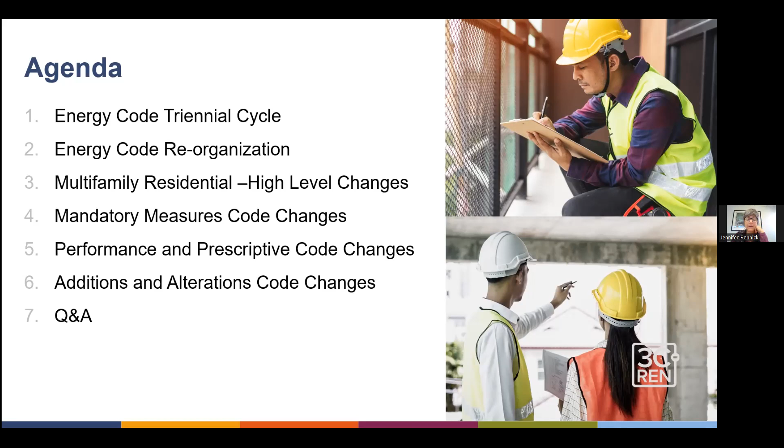Today, we're going to review real quick the Energy Code triennial cycle and just highlight a few of the Energy Code reorganizations. Then we're going to go into multifamily residential, kind of the high level changes, some mandatory measures that have been updated, performance prescriptive method changes, and hit on a little bit of additions and alterations. We'll hopefully have a little time for questions and answers to get to all questions, but like Grant mentioned, if you put them in the chat, we'll be able to take them as they come if it's applicable to the slides.

One of the key things with the California Energy Commission and Title 24, and depending on how long you've been in this line of work, you may or may not know that the California Building Energy Efficiency Standards and all of Title 24, which includes our building codes, they're updated every 3 years. It's a process that includes industry stakeholders, in-house expertise, and the general public. All the decisions that go into the energy code have to be proven that they are cost effective.

Some of the big picture goals for this code cycle for 2022 update is to encourage heat pump technology for space and water heating, and to establish electric ready requirements for single family and multifamily projects. That includes expanded PV systems, photovoltaic solar systems, and battery storage standards that are now applicable to multifamily, both low rise and high rise.

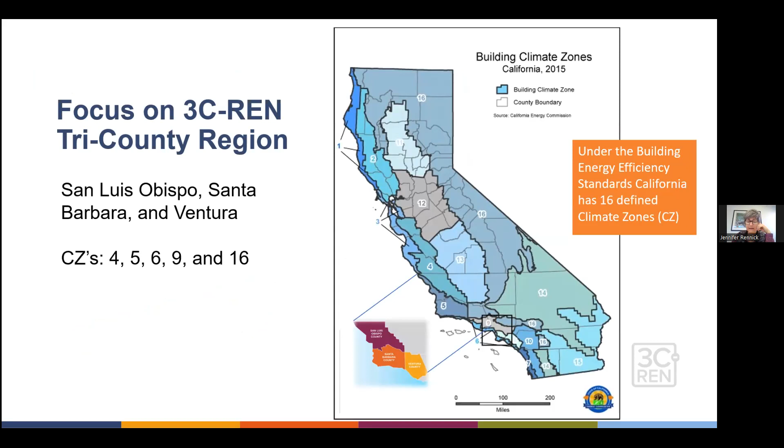So the newest 2022 building code went into effect January 1st of this year, 2023. If you would like more information on the specific code language itself, that's available at the energy.ca.gov website, or you can just Google California Energy Code Standards and it'll take you there.

Also on 3C REN's website, we have a resource library through the Energy Code Connect, and we have links directly to the most recent codes, which I find this link—whoever put this together, Sarah did—made it simple. So it's nice to have it there.

The energy code for multifamily has essentially been reorganized to accommodate the multifamily standards. What I mean by that is the multifamily occupancy type was pulled from what was called the residential standards and from the non-residential standards and combined into its own multifamily standards section of the code.

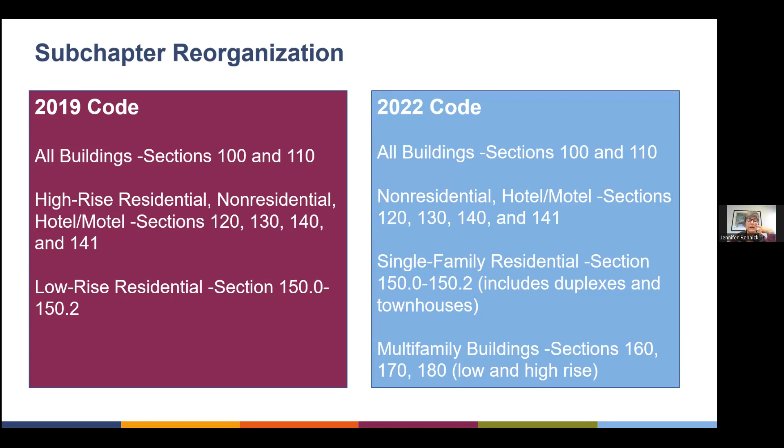Now under the 2022 code, we still have our all building sections, our non-residential hotel motel sections, our single family residences—that includes duplexes and townhouses—but now we've got this whole new section for multifamily buildings, including both high and low-rise residential.

For those of you who are visually oriented—oh, and by the way, you will be getting a copy of the slides, so you will have these as reference—but for those of you who are more visually oriented, I put a building tree out there.

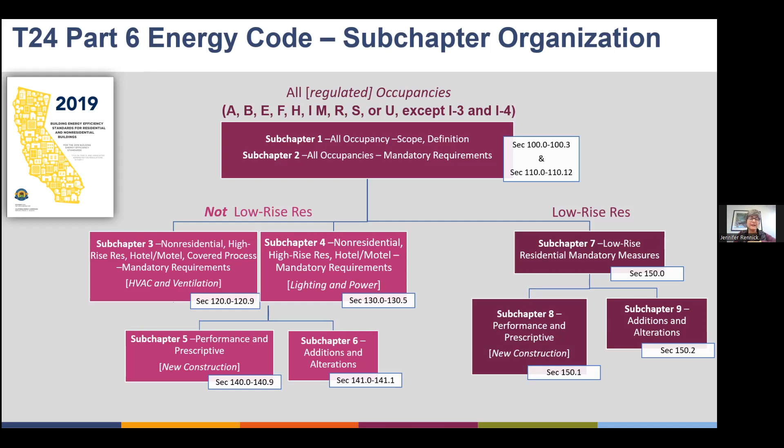So you've got your big categories for everything that is all your mandatory measures for something that hits all occupancy types. Then we had subchapter 7, 8, and 9 that was specific to low-rise residential, and basically everything else that wasn't low-rise residential. Now we've got our non-residential sections, our single family, and our multi-family, and it has its own 3 chapters that mirror the organizational structure that the single family residences followed.

So if you're used to looking those things up in the energy code for single family, the multifamily follows that same kind of hierarchical organizational structure.

And the one key difference now under the multifamily residential portion is it's trying to address within the code common areas that typically are not in the dwelling units, which you would have found in the non-residential section as a separate part from the high rise, even if you're in a low rise occupancy. Now they've combined it so you can go straight to this section to also find out about the corridors, lobbies, staff rooms, lounges, community spaces, and other shared spaces.

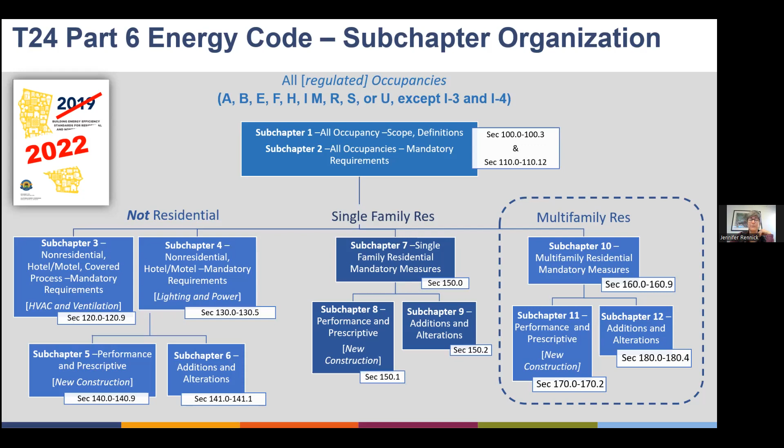The multifamily residences have a few high-level changes applicable to all of the sections, which is that there's been updates on the dwelling unit ventilation, domestic hot water requirements, some space conditioning requirement updates, a few lighting changes—not many actually. There's something called electric ready that you may have heard about for low-rise residential, which is applicable to the dwelling units of the multifamily.

And then there are photovoltaic and battery requirements. PVs were required for single family residences under the past code, but now under the new code, photovoltaics are required for multifamily high rise, including non-res occupancy types, and there's also a battery component with that.

Each code cycle, this is kind of typical, a number of the changes that were part of energy efficiency under the old code cycle get moved to mandatory requirements, and then new requirements prescriptively and optional performance method requirements come into play.

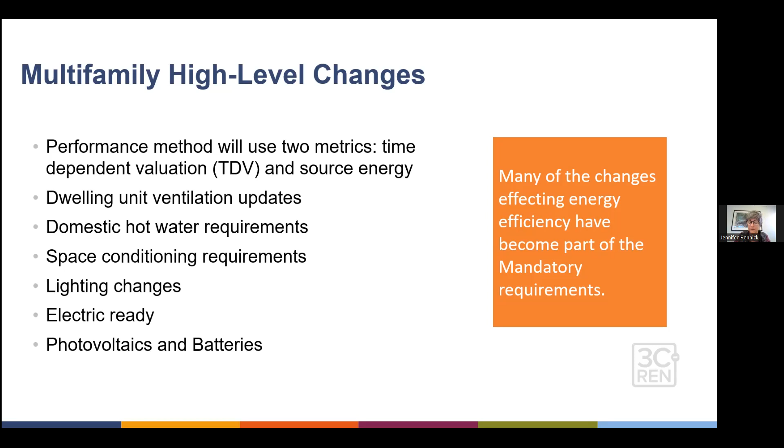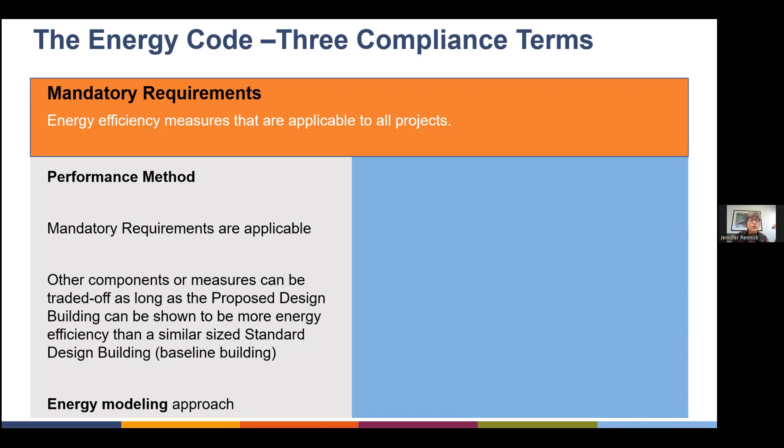There's a little vocabulary review I want to give you. You're going to hear me talk about mandatory requirements, and that's a reminder it's applicable to all the projects regarding energy efficiency. In this case, we're going to talk about a couple that are all occupancy, but mostly multifamily. And then there's the performance method, which means your energy modeling approach, so you can do trade-offs amongst requirements under that approach, but all the mandatory requirements are still applicable.

And there's also the prescriptive component package, or essentially we call it like a checklist approach, sort of following a recipe card. It's this checklist under the prescriptive component package that becomes the baseline for your performance method that you're going to compare to.

So as we go through the prescriptive component package, if you choose to do everything under the prescriptive method, you follow all the parts of the checklist. But a lot of our clients will learn what the prescriptive requirements are, and then when it comes to their actual design, we'll run a performance computer method so they can more or less try to pick and choose and optimize which of those prescriptive component packages are most appropriate for their project.

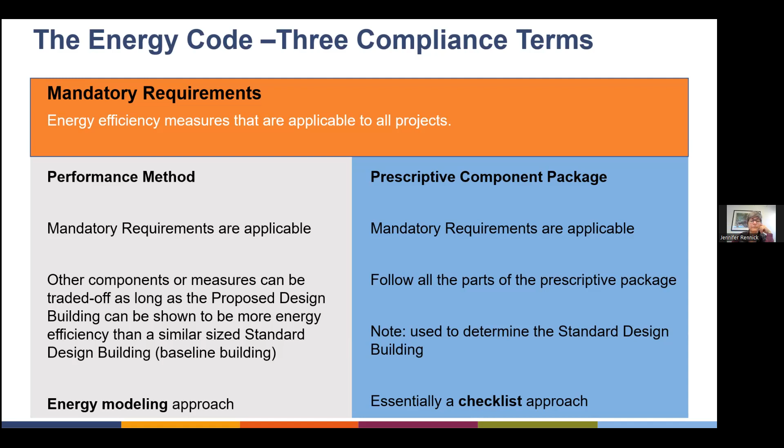There's a new metric when you do the performance method or computer modeling, called source energy budget. This source energy budget is basically being used as a proxy for carbon emissions or carbon footprint. So it's a little different than our old metric, which is TDV, time dependent valuation.

And that is still part of what you have to do to show compliance. But the source energy now adds on another layer that's specifically associated with the pollution, the carbon emissions and other related pollution emissions associated with the distribution and creation of the energy.

Here's a graphic to give you an idea of that. Source energy includes the building, that includes the wind power, solar power, the gas peaker plants, includes all of it, but now it's being used as a proxy for carbon in new construction. And then TDV continues to be the metric for both what's called an efficiency score and a total TDV score.

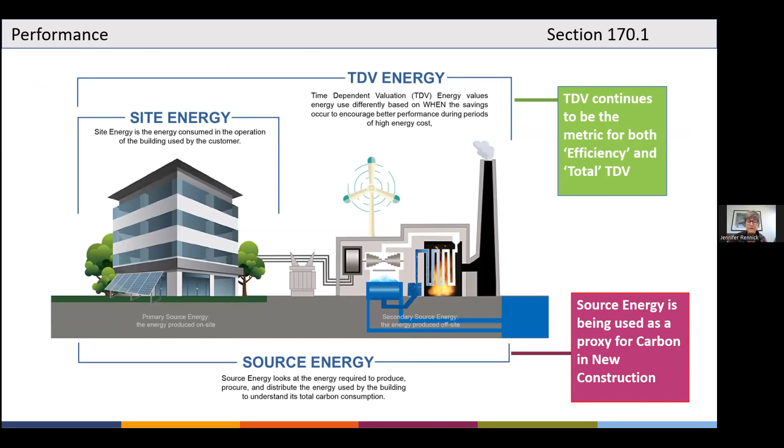So what that looks like now in the compliance form is an excerpt from that: your building complies if it shows pass under the time-dependent TDV valuation, both in terms of efficiency measures and total, which includes your PV battery, and then your source energy total as a proxy.

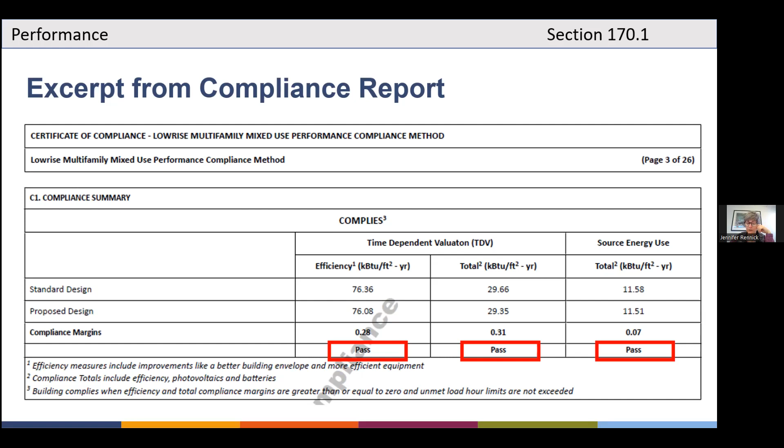I've played around with this a little bit on a couple of projects, and I've had my projects pass under the TDV, no problem. And then I'll have a source energy score where it doesn't quite pass or it's barely passing. If you look at this example, this one's just barely passing at 0.07, which is good enough to get your building permit.

But that carbon, that'll be an interesting thing to play with. I don't know, Grant, if you've had much time to play around with that carbon proxy and see where it lands. But what I found is that I could add more PVs or swap out some gas water heaters to heat pump water heaters, and that took care of that carbon proxy.

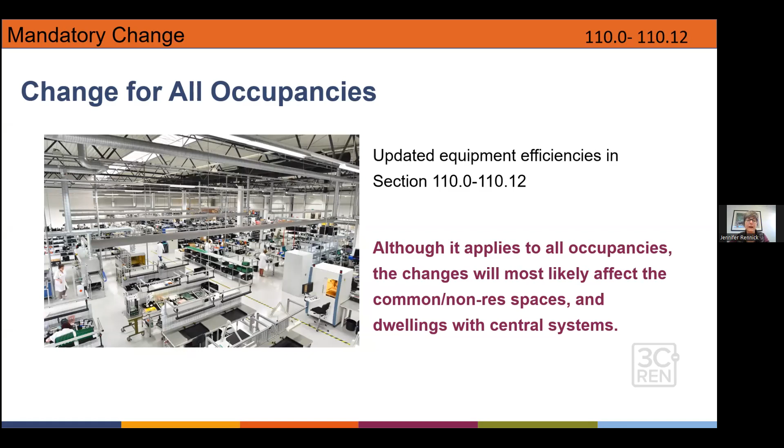For all of the changes for all of the occupancies, sections 110 through 110.12, it's mostly going to affect the non-residential spaces, but because multifamily buildings include some common non-residential spaces, some of these mandatory measures are going to come into play. It mostly has to do with the equipment efficiencies of the heating and cooling equipment, is what I've noticed. Otherwise, a lot of those overall mandatory measures haven't changed that much from the 2019 to the 2022 code.

Now, there is a section under these mandatory measures that I think is worth reviewing, specifically addressing mixed occupancies, which you have with many multifamily buildings. In other words, you may have a large portion of that multifamily building being actual dwelling units, so that would be a residential occupancy. And then some portion of your building is going to have maybe common corridors. It could even have a manager's office, a small cafe, or retail space.

Depends on the scale of the project. What's important with this section is it spells out that you can follow one set of guidelines if 80% of that conditioned floor area is associated with one occupancy, such as the dwelling units. But you might have 20% of that occupancy associated with common spaces. Those common spaces, non-residential occupancies, would have to comply with the mandatory measures and lighting measures, and a lot of the glazing and wall assembly associated with the other occupancy if you truly divide it out. But mostly this is going to point you back towards following the applicable lighting and ventilation requirements. That was probably a long way to say that.

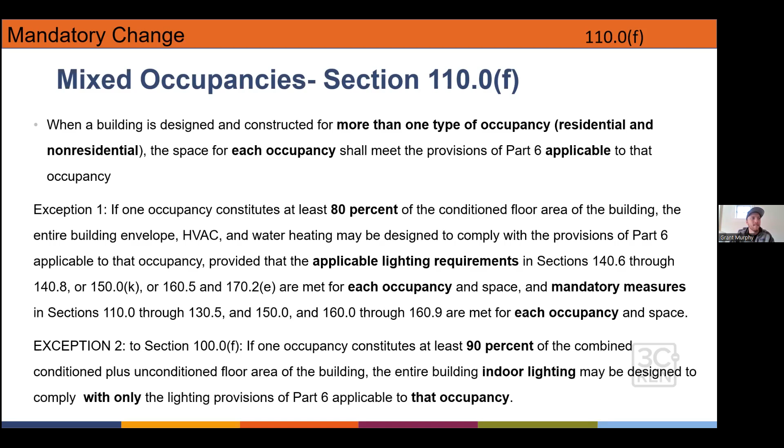This new section under multifamily, section 160, is broken out into general scoping, building envelope, ventilation and indoor air quality, space conditioning systems, water heating systems, lighting indoor and outdoor, electric power distribution systems, covered processes, solar-ready buildings, and electric-ready buildings. If you're familiar with the building energy code, you might look at this and say it's kind of a mash between what you'd see in non-res standards and residential standards.

It follows along all the things you'd have in the residential occupancy, like your envelope, your indoor air, your space and water heating systems. There's mention of lighting, but because this is multifamily mixed occupancy, we're looking at lighting indoor and outdoor that's very much like the requirements in the non-residential standards. The electric power distribution, covered processes, solar ready, electric ready—that's similar to the non-residential standards. So there's a blend of that in this part.

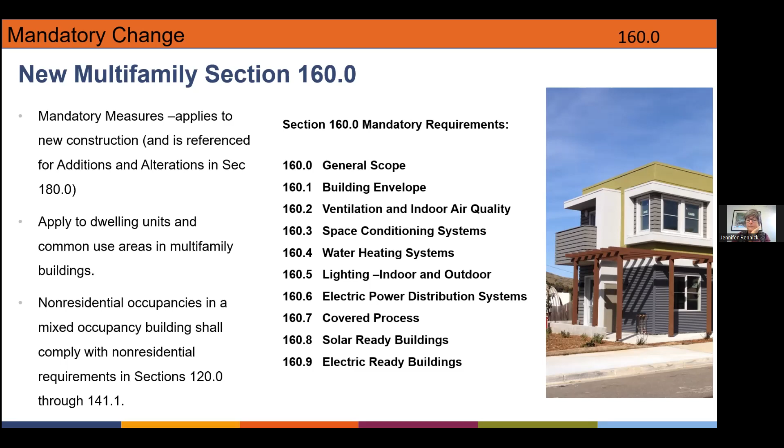For the indoor air quality, IAQ, the big picture change really has to do with the structure of this being pulled together, both residential and non-residential, and it's broken into: is this building 3 stories or less, or 4 stories or more, which was the old way to look at our multifamily occupancies. It still is, except now it's all under one big section.

So you've got attached dwelling units that are going to follow the residential code essentially, and those same updates apply here for 3 habitable stories or less. You're going to need HERS verification and diagnostic testing for that. But the other occupancies, for residential projects that are 4 stories or more, you're going to be following essentially the same way the non-residential code is laid out, and you'll look into a different section for HERS requirements under the non-residential appendices.

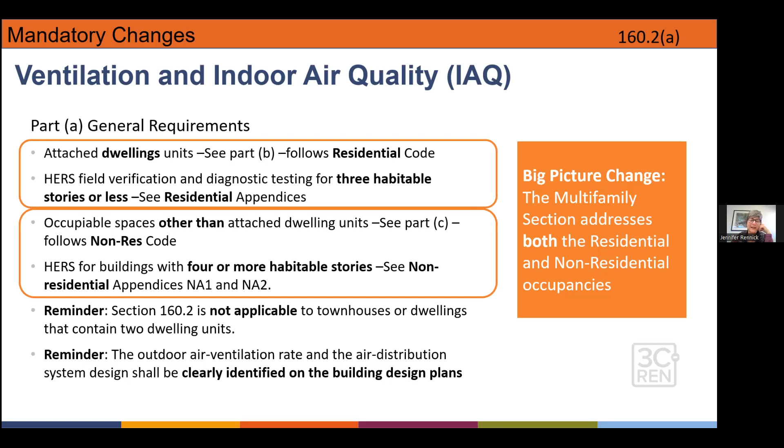Now, the new 2022 code under the dwelling unit indoor air quality has had some updated and additional language added, and we'll touch into that a little bit more. There's clarification around something called an integrated central fan ventilation system—I have a slide on that next. There's been some updates on kitchen and bathroom exhaust, and a bit of clarification on balanced ventilation and heat recovery and the fan energy allowed for that, depending again on whether it's low-rise multifamily or high-rise multifamily.

Those requirements are different, with some testing of those ventilation air systems. The main takeaway is that ASHRAE 62.2 continues to be the basis for dwelling units, for the actual residential occupancies, and ASHRAE 62.1 continues to be the basis for the common space or non-residential occupancies. So there's still consistency with occupancy type and how much ventilation is required. Now they've put it into this section so you can just go to one chapter to see everything you need for your multifamily project.

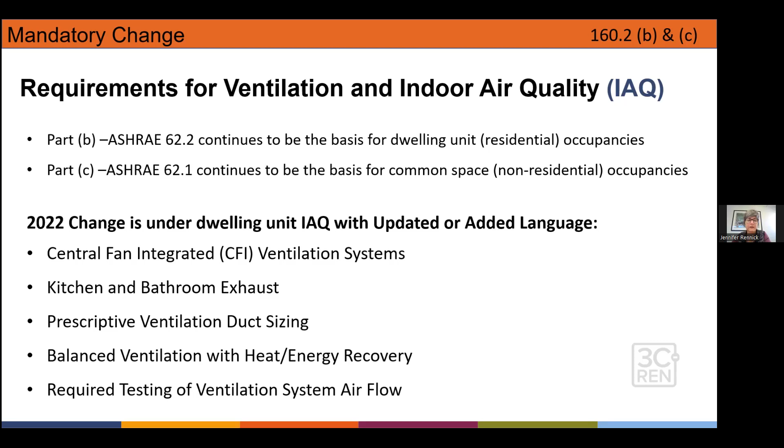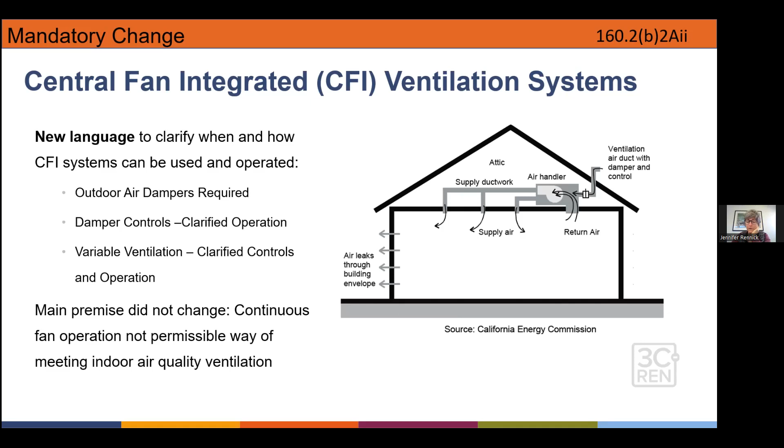For projects that have tried to introduce fresh outside air into their dwelling unit using the central fan that's part of the air handler for a ducted system, there is language to clarify what you must do in order to do it that way. It does require outdoor air dampers and specified damper controls, with language clarifying how they should operate and that controls need to allow for variable ventilation. But the main premise didn't change: you're still not allowed to run the main air handler fan continuously to bring in your outside air ventilation, because that's been shown to use too much energy and an unnecessarily large volume of air for how much is usually required.

The most common way to introduce outside air is still probably to use a local exhaust fan that runs continuously. Although that's allowable, it does mean that for a multifamily project, you would have to engage your HERS rater to test that each of those dwelling units is self-contained and that you're not having too much air barrier leakage between the dwelling units.

So one way to resolve that is to use what's called balanced ventilation. That means you could pull air outside directly and exhaust it directly on each dwelling unit, which would include some positive supply, or you can use an ERV or HRV system, which allows for heat exchange and greater efficiency. Depending on the size of the dwelling unit, sometimes you can buy these integrated as one system, like Panasonic makes, or you could buy a separate supply fan and exhaust fan. I'll show you an example of an ERV, what that looks like in our prescriptive requirements. I've got a slide on that.

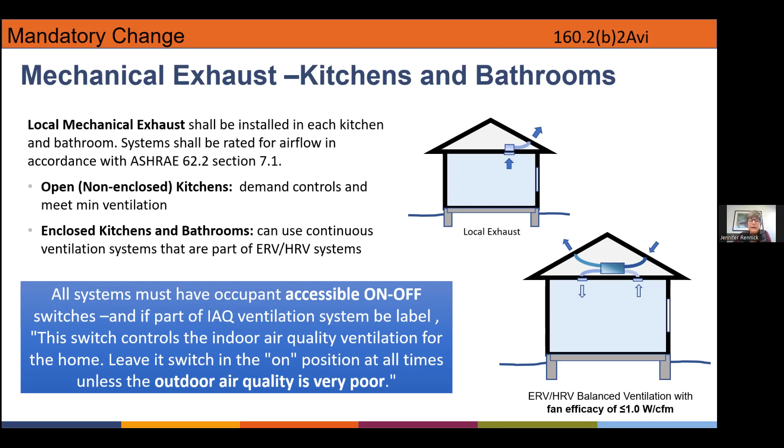When it comes to kitchen range hoods, this section is new, and there's a new metric called capture efficiency. Kitchen hoods are being rated for their capture efficiency, meaning how well they capture the steam, air, and particulate matter coming off of your range or cooktop, and actually entering into the hood and being exhausted to the outside.

Just as an FYI, fairly recently I've seen multifamily projects where the builder did not duct the hoods to the outdoors, working to make that project more cost effective from the builder's perspective, using a recirculating ventilation hood tied to a microwave. That's technically not allowable. So the fix was to add a secondary fan to that kitchen that met the CFM requirements for that space, which in the end added cost to the project. So just a heads up that microwave-style recirc fans above the range are not appropriate, and it needs to exhaust to the outside.

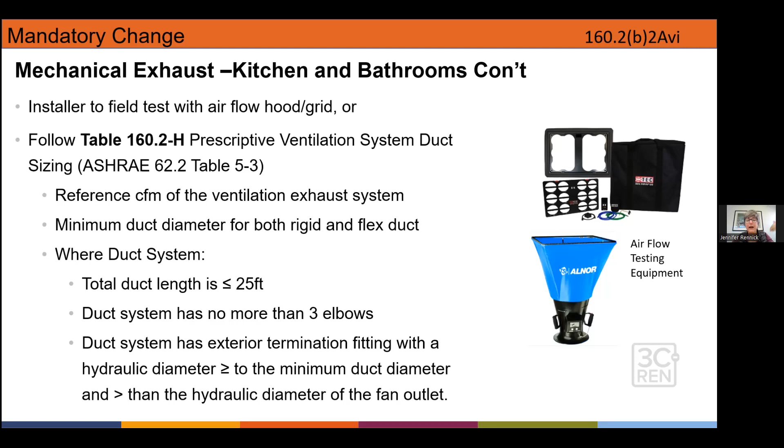When it comes to that mechanical exhaust kitchen and bathroom system, they do need to be tested to show that they can pull the correct amount of CFM, or that you're meeting that capture efficiency. If you don't want to show it that way with the tested system, you can follow a prescriptive requirement and just show that, for example, the duct length is no greater than 25 feet and has no more than 3 elbows, and that it also meets other requirements with the termination fittings and how it's exhausted to the outdoors.

When it comes to lighting, there haven't been that many changes, and the mandatory measures really just clarify that a lot of the lighting sources are LED, and a lot of those specific requirements for LED lights are pulled from what's called the JA8 requirements, because the LED light sources are considered high efficacy.

There's some clarification on recessed luminaires as well. One thing for this section in general is that there's a section A that deals specifically with dwelling unit lighting, and then a section B that deals with non-dwelling unit or common space lighting, parking garages, and outdoor lighting. Here's one of those cases where it's pulled out separate, but then it refers you back to section 130, which is the non-residential standards. So there's still a little bit of back and forth on some of the requirements, but at least in one place you can right away see how you're going to apply the lighting standards to both the dwelling units and the non-dwelling unit areas.

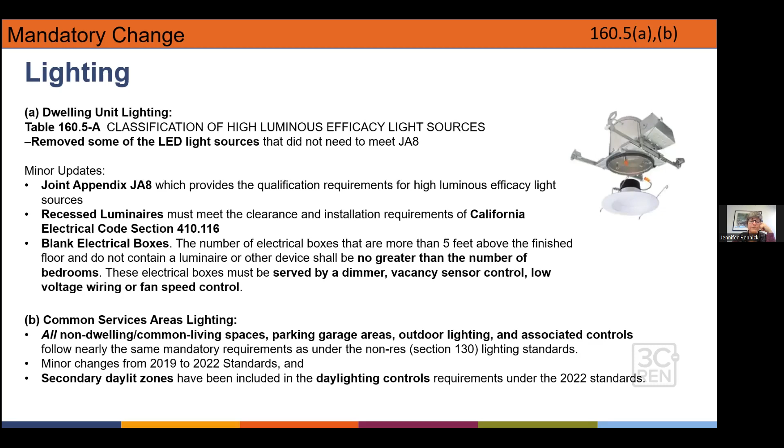For the electric power distribution systems, again very minimal change, and it's in the multifamily section of the code, mostly to clarify that these requirements, which you'd typically find in the non-residential standards, are applicable to those portions of the multifamily building that are not a dwelling unit.

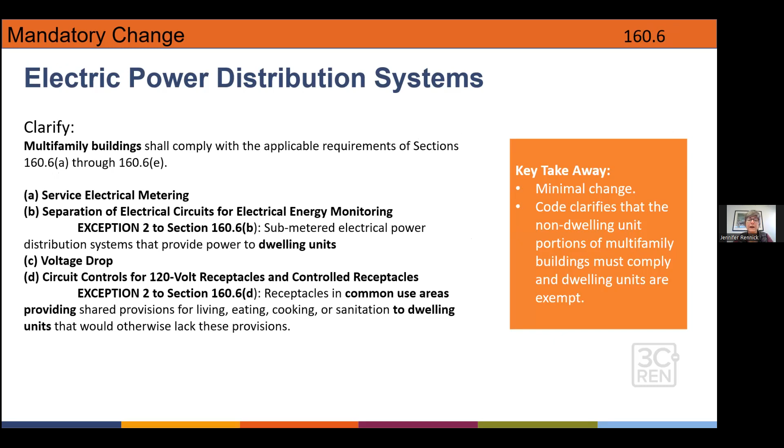This is kind of a new section for both single family and multifamily. Rather, it's repeated in the multifamily part of the code with the same language but different code sections as in the single family. This is part of the electric ready requirements, as California moves more and more to having electric appliances that are more energy efficient and have a lower carbon footprint than gas appliances.

So the code doesn't say you can't install a gas appliance. What it does say is that if you install a gas appliance, you have to have the infrastructure, the appropriate outlets, conduit, and wire run for a future person, future building owner, or future remodel to easily swap out the gas appliance for an electric appliance.

And that holds true for dryers, both in the individual dwelling units and in the common spaces. It holds true for furnaces that you might have in individual dwelling units, but would be ready for future heat pump installation. And that also holds true for the water heaters.

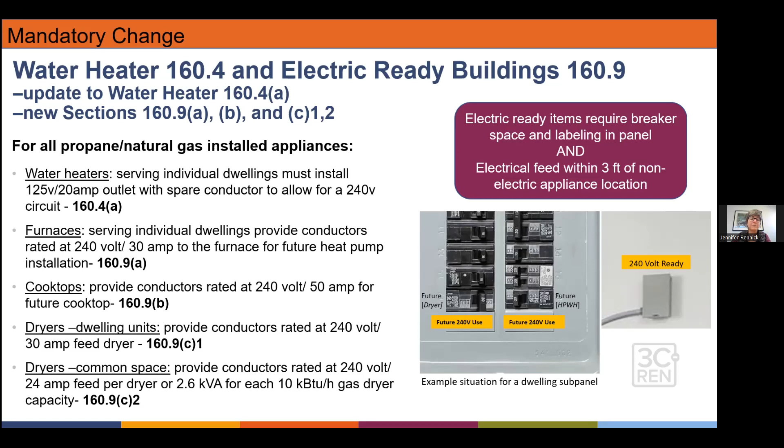Or in the case of a furnace, sometimes if the furnace is located in an attic, for example, like on a low-rise project, it may not make sense to put the electrical outlet next to that furnace, but you would need to make sure it was all set up to accept the heat pumps for the outdoor condensing unit in an appropriate location.

Before we move on, are there any questions on the mandatory measures and updates, or anything you'd want to add?

John asked how we would determine the capture efficiency of range hoods, since he's never seen it on a spec sheet. That is a new metric, and not every hood manufacturer has done the testing to have their particular appliance tested yet, but that's going to be coming on board more and more. At some point, it'll be a requirement that the manufacturer include that metric. Right now, it's going to be hit and miss. It's a heads up to everybody that if you have a manufacturer that does list their capture efficiency, CE, you can use it, or contact the manufacturer to find out if they've done the testing yet and just haven't reprinted their cut sheets.

Okay, under the prescriptive changes, we're going to hit on some of the highlight changes. The prescriptive section now covers the building envelope, daylighting of large enclosed spaces, similar to the non-res standard, space conditioning systems, water heating systems, lighting both indoor and outdoor, signs, and then we're going to look at the photovoltaic or PV solar requirements.

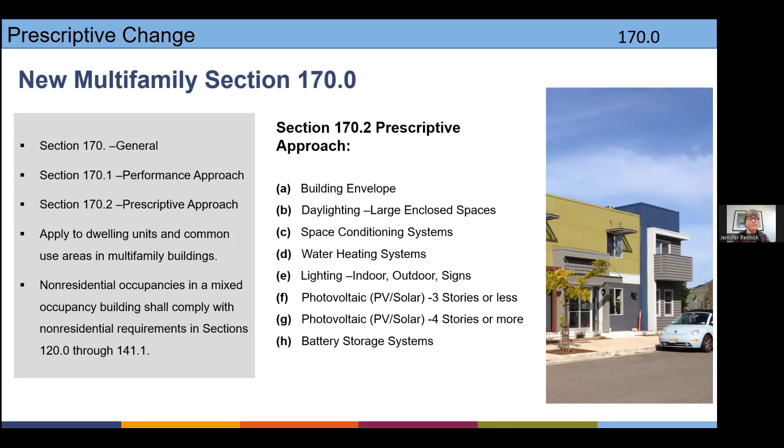Real quick on the envelope measures, roof and ceiling insulation. Prescriptively, it's laid out as 3 options, called B, C, and D. B is attics where you have ducts in the attic, option C is also attic, but now your ducts are interior or in conditioned space. Option D is a non-attic roof, like a cathedral roof. There are really very few changes between the 2019 and the 2022 code.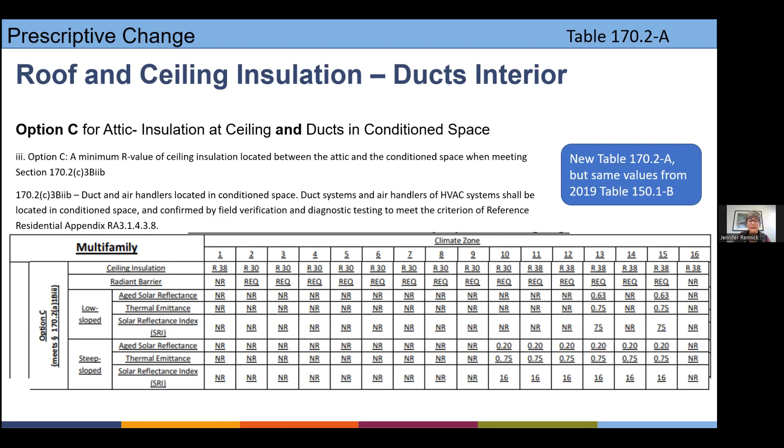Now what is new is that since they've combined the res and non-res, or the high-rise and low-rise multifamily, there's a little bit of change on what's required for cathedral ceilings, and it's by assembly type. So there's recognition in the code that you may be framing this out of metal because you have a metal building. So the metal building U factor — and again, it switches now to a U factor and not an R value, which I go back and forth between in my head without thinking about it — as I'm talking to you all, I realized a U factor of like 0.041 might not mean anything to you unless you do code work as much as I do. So this is something to be aware of when you see this U factor. If you're an architect, you're going to have to dig up your old building science class or talk to your energy consultant to translate.

For a wood frame building, for example, 0.034 U factor is essentially your R30 to R38 cathedral ceiling. For a metal frame building, it takes into account that you're going to get some thermal conduction through the metal frame, so the U factor is higher to account for that.

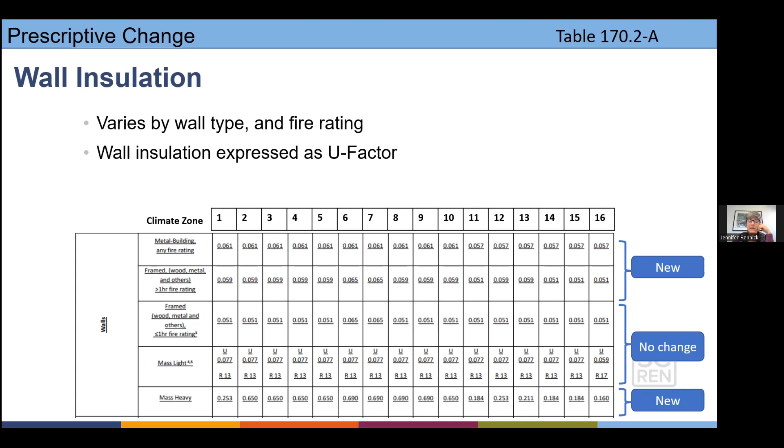Same concept for the floors and soffit insulation. I'm not going to go into all this in detail, it's very tedious, but big picture: depending on the structure, whether it's wood frame or raised mass, meaning concrete, those requirements are the same, but now they've added a category that basically includes all other that's not listed above. So as you work through this with your energy consultant for what you need in the envelope, it's going to change depending on what structural system you're using.

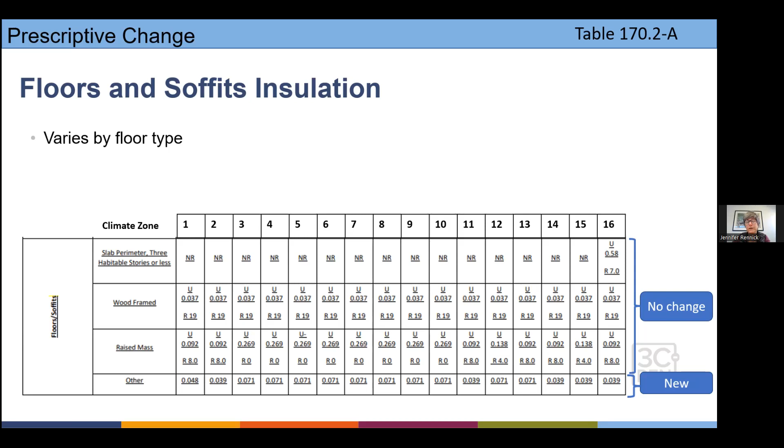For quality insulation installation, QII, that a HERS rater would look at, there's essentially no change for low-rise residential buildings. QII was often required under the 2019 code, and it's still going to be often required under the 2022 code. Prescriptively required, but could be a trade-off under performance method. That part hasn't changed, and QII is still not required for high-rise multifamily.

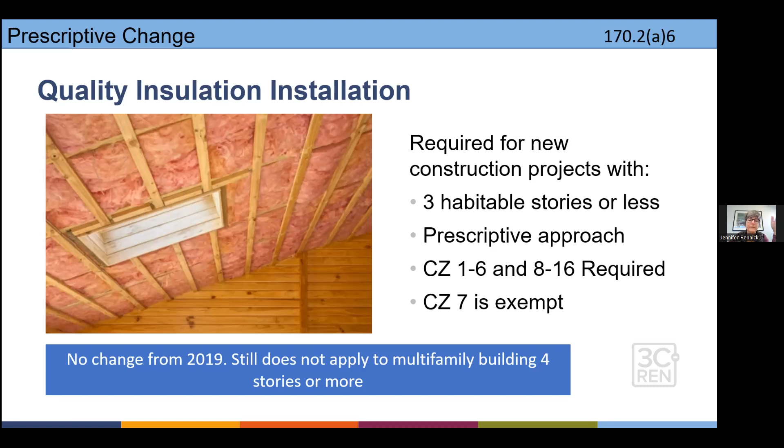Under the fenestration, windows, low-rise was pretty straightforward on what was required for the windows. Now, with it all being combined with high-rise residential, it's a little more complex. Again, you're going to be looking at climate zone, which is different than the old non-res. It wasn't really laid out by climate zone, but it is under the multifamily section.

It's broken down into whether or not you are going to have a curtain wall, and then perhaps a different system, and then you're going to need to go into the next column and decide if it's 3 stories or fewer, 4 stories or more, and then also what is that window to floor ratio, window to wall ratio, and skylight roof ratio.

So prescriptively, you need to follow each of these as you go into the tree. Make sure you match. I don't know many teams using prescriptive method as an overall approach, but I point this out because this is what is going to be used as the baseline for your performance method. So depending on what windows you use, it could have a large impact, or it might be a way to mitigate with something else in order to use the windows, the type you want and where you want it.

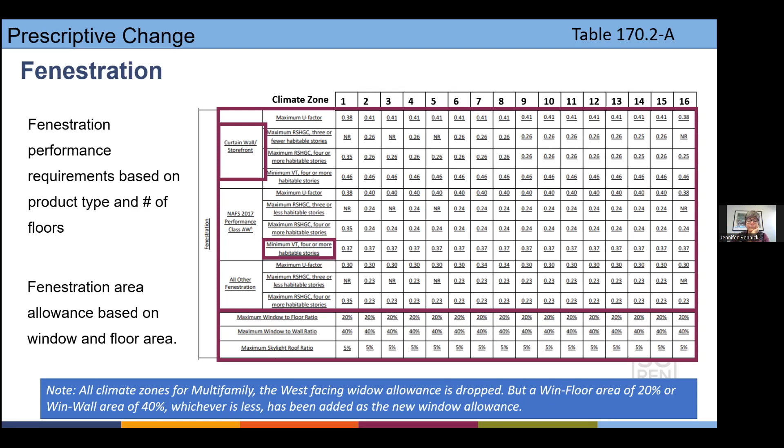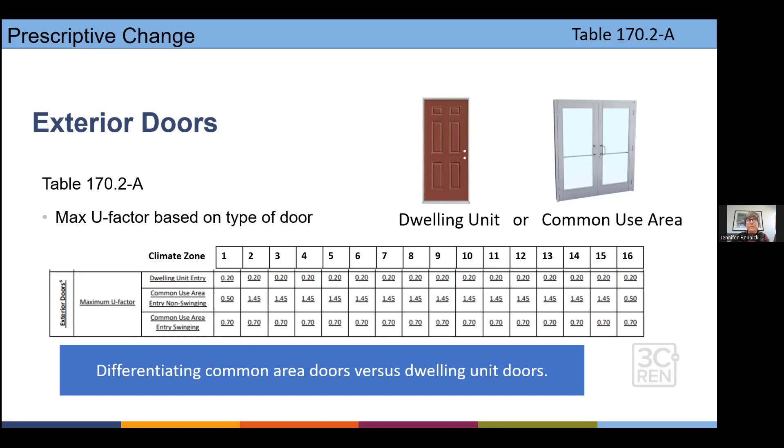There's a little bit of change on the exterior doors, and the main point here is that if it's a dwelling unit door, it has one requirement. And if it's a common use area door, entry door for all the common spaces, they have a different set of requirements, which is more matched to the non-residential standards.

For space conditioning, just the dwelling units only, it's again broken out to 3 stories or less, or 4 stories or more. And the real nuanced part is to look and see which climate zone you're in. But for most of the climate zones we're dealing with, like 3, 4, 5, 6, and 9, the space conditioning system shall be a heat pump. And if you choose not to use the heat pump in a performance method, the heat pump is going to be what you're compared to. So that's a pretty significant change.

And for the 4 stories or more, about the only difference is that climate zone 1 is now included with climate zone 16, and it could be a dual fuel heat pump, meaning in this case gas and electric heat pump with smart controls in there to be able to use the gas heating when the efficiency isn't there for the electric heat pump.

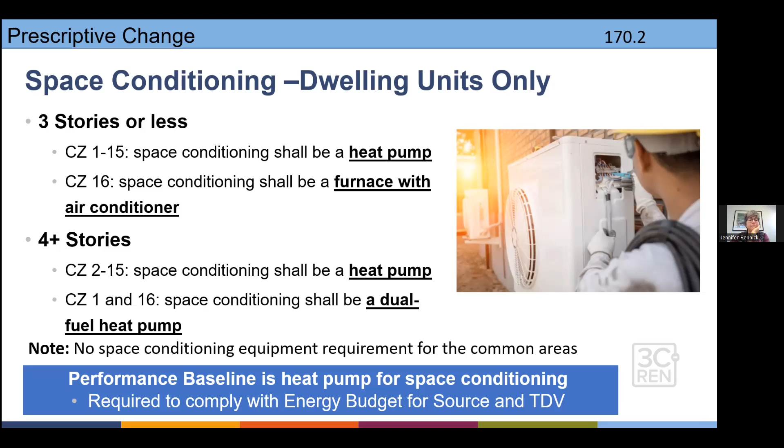Here's that ERV, HRV system I was mentioning under the mandatory measures. As a mandatory measure, you can use an ERV and HRV, and you wouldn't have the dwelling unit compartmentalization component if you use balanced ventilation.

And this balanced ventilation, if you do use it, there are now certain requirements that you have a certain fan efficiency for the ERV, HRV, and that is also dependent on how you're heating the space, and if it's 3 stories or less in a particular climate zone, 4 stories or more in a particular climate zone. It's nuanced.

So without going into it too much more than that, just know that it's there, and then you're going to want to work with your energy consultant or someone on your team who will dig into these requirements. It might be your mechanical engineer to have the project have the appropriate system with the appropriate efficiency, fan efficiency.

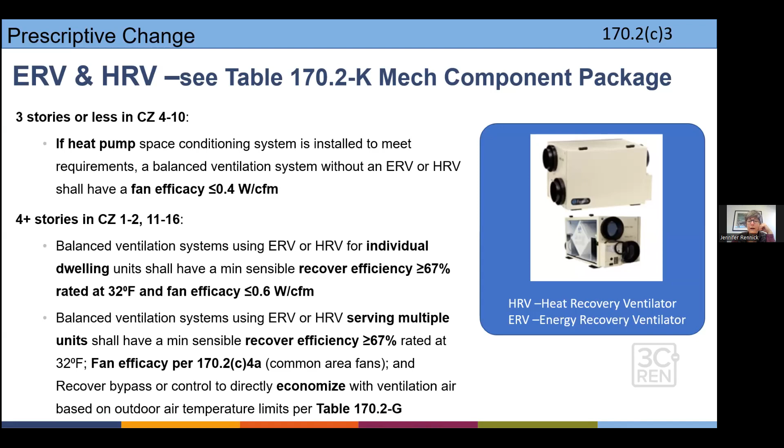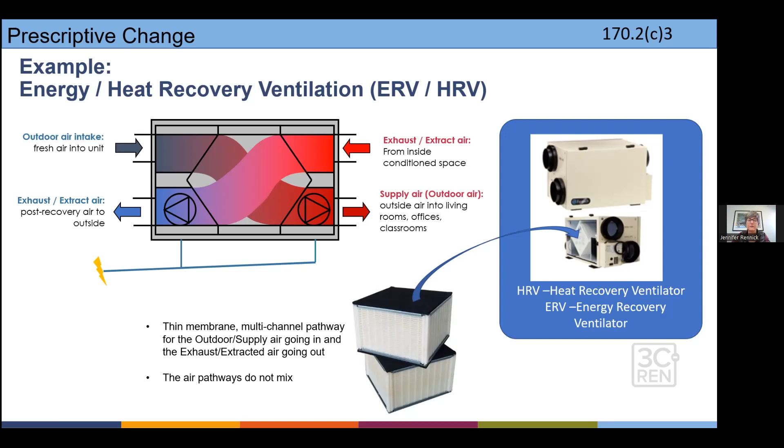And recovery heat efficiency. For those of you who are not super familiar with the heat recovery ventilation system, the system is ducted so that outside air, in this case quite cold, as it's entering into the supply air, it is being heated with the exhaust air that's already warm, that's being taken out of the space, and that heat is being transferred into the incoming air. So now the exhaust air is cooler and the incoming supply air is warmer. These two air pathways don't mix, but they transfer through a thin walled membrane that allows the heat to be transferred between the two flows of air.

And if not, for the architects and plans examiners, etc., just know that this is also part of the prescriptive requirements, which oftentimes they're probably going to be doing it performance method - well, no, I take that back, not always. But a lot of times the mechanical systems are just run prescriptive. So if they do that for these outside air systems, or it's often called dedicated outdoor air systems, or DOAS.

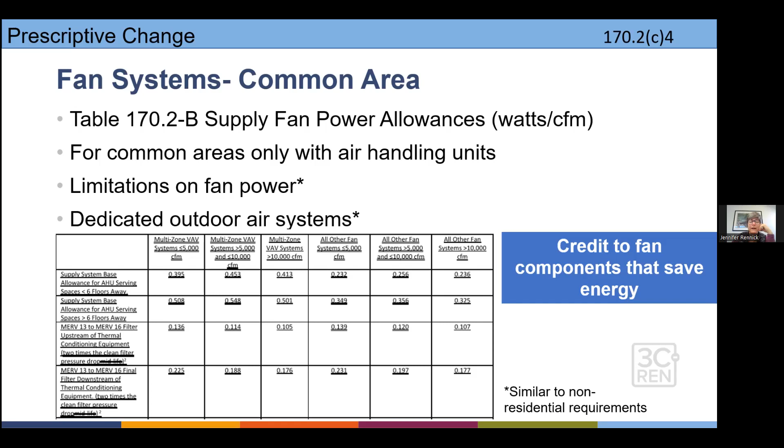It also has to do with what size filter is in the system, because that affects the static pressure, which affects your fan and your fan efficiencies. And so this table goes on and on. The main idea here is to give credit to fan components that are saving energy and to adjust for that filter pressure drop, which was avoiding a loophole in calculating a mid-life pressure drop for filters. That already might be too detailed for some of you, but it's there.

Okay, you know what? Grant, Andy goes, reel me back in. So jump in or go, wow, that's super interesting, Jennifer. I bet it's too detailed. But you guys in the chat also, you'll get a copy of the slides, and you can always contact our Code Coach service for any of this.

When it comes to the domestic hot water system, we've got a requirement for individual dwelling units, heat pump water heaters for multiple dwelling units, meaning 8 dwelling units or more, or you could have a gas or propane system for multiple dwelling units. Even under the individual dwelling units, you can use a gas or propane instantaneous water heater under certain conditions.

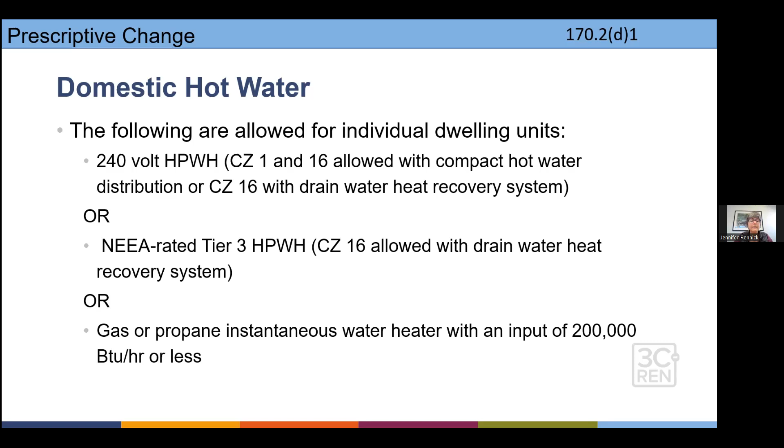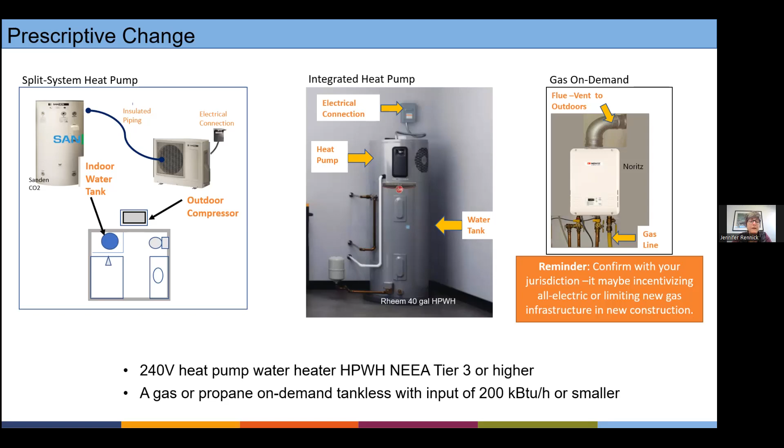So what that means is that you need to basically go in the code and take a look at what climate zone you're in. And then based on that, you can take a look at your hot water heating options. Here's a kind of graphic of what that would look like, where as long as your gas on-demand unit goes to each individual dwelling unit and it has an input of 200 kBTU hours or less, you can use it. Otherwise, you have a couple options on heat pump water heaters that you can use.

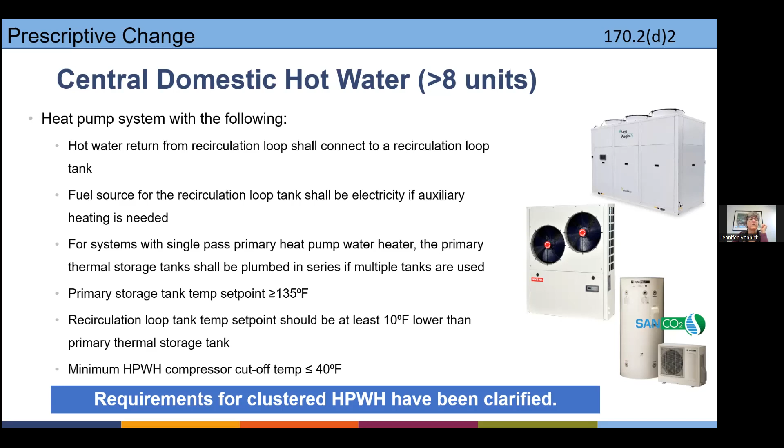For central domestic hot water systems, meaning 8 units or greater, the main takeaway is that the language has been clarified on what you're allowed to do for heat pump water heaters. In all cases, they are split systems where you've got the unit outdoors that takes care of the heat pump water heating, sometimes called the outdoor condensing unit. Through hot water piping, it sends that heated water to tanks to be stored, and it clarifies that you need another small tank as a way to provide the recirculation for that project, the recirculation loop. These requirements are spelled out prescriptively.

Probably one of the biggest changes for your gas or propane system, which is pretty typical for multifamily, is that you don't need the two recirculation loops. For mechanical engineers on the call, we still have that same requirement of needing solar savings fraction. So solar hot water, if you're using a gas or propane system, that requirement is still the same. But we are seeing more and more projects moving to heat pump water heaters for their central system.

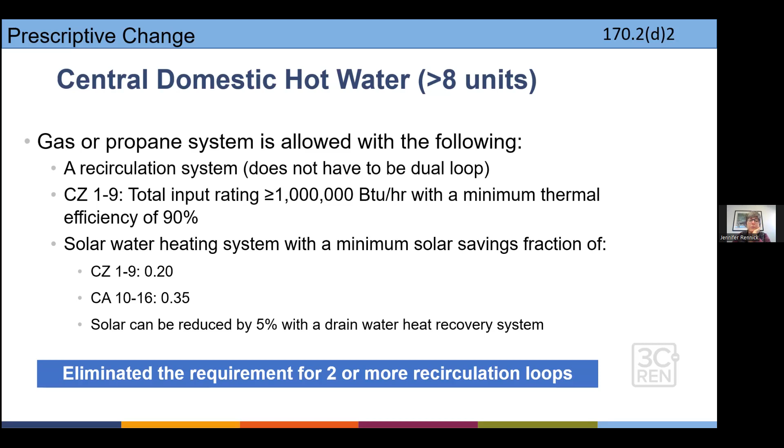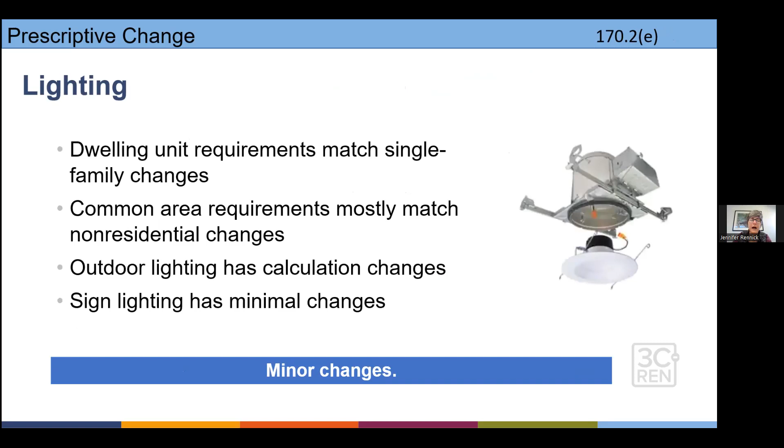Lighting has very, very little changes. Basically your dwelling units have the same kind of lighting requirements as single family, which is true from the last code. Common areas are following the non-res standards, outdoor lighting, sign lighting, outdoor standards. There's just been a tiny amount of changes in that.

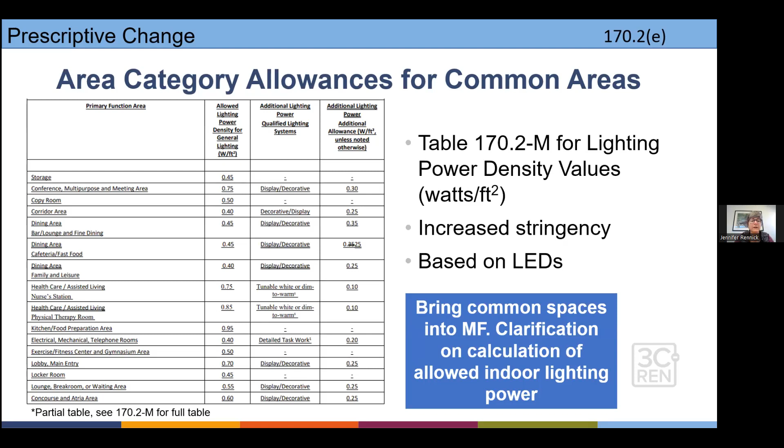For the common area allowances, they're slightly less for lighting power density, meaning how many watts per square foot. There's been some clarification on how to calculate that. For electrical engineers, or when you work with your electrical engineering team for your multifamily project, they're going to be familiar with these requirements. Not much has changed, so from the designer's perspective, I don't see that the architect has to worry about it too much, but just a heads up that as LED lighting has become more efficient, the requirement threshold is dropped down to match.

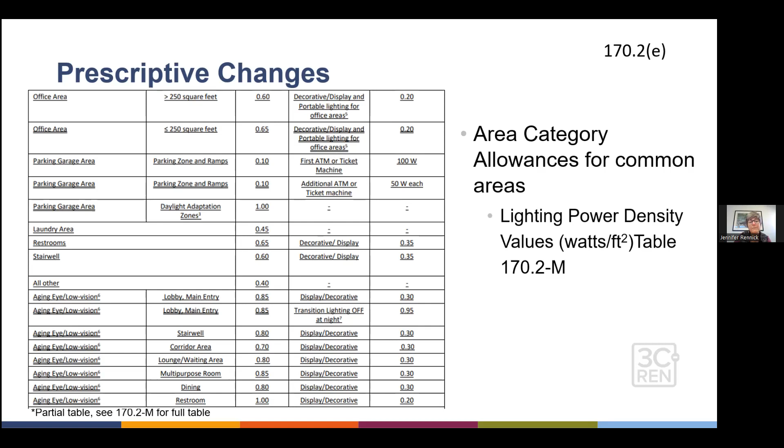Outdoor lighting, probably one of the significant changes is just how your property is classified, whether or not it's considered moderate or moderately high level of lighting allowed, and that is based on the 2010 US census. So they're not considering the moderate lighting area to be rural, but they're calling it urban clusters. I noticed this came up on a workshop I did with 3C Ren, and I think this is a new change that not everybody has been alerted to. Not all of the planners and engineers I talked to during this workshop were familiar with this new definition. So this may come into play and may change the lighting a little bit for your project.

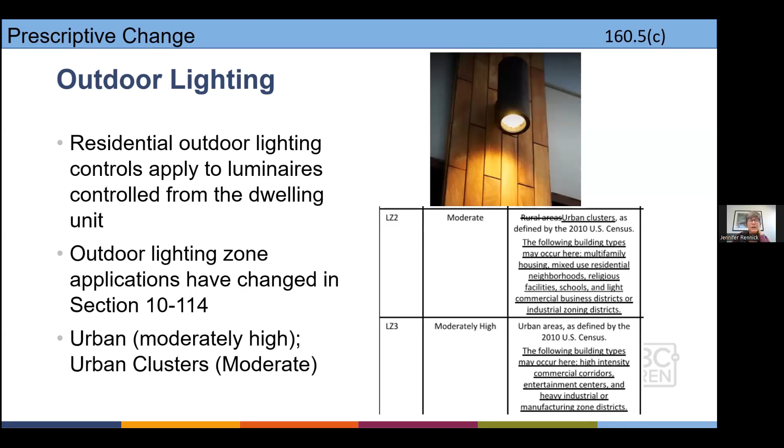This is more applicable to your electrical engineer, but the main change from 2019 to 2022 code is how they're going to be able to calculate your baseline for your general hardscape on that multifamily. The end result is you'll end up with probably a little less energy for your lighting system, but your designer would still need to meet all the requirements you would want for lighting. Meaning people still need to be able to see what they're doing and get into their cars, for example, and be safe. But how it's calculated has changed a little.

Solar PVs. This is probably the biggest section of change for us. I have a few slides here and some methodology to show you how you can calculate how much PV or solar photovoltaic is going to be required for your project. But before I dive into that, was there any other questions on some of those big picture prescriptive changes for multifamily?

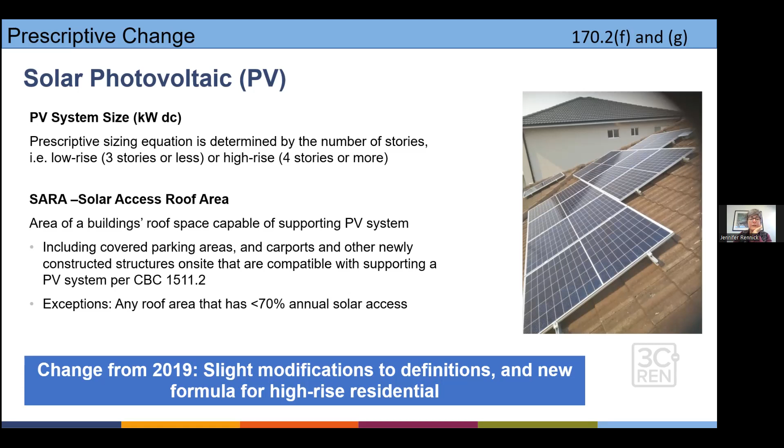For PV systems that are 3 stories or less, the formula is based on the conditioned floor area and the number of dwelling units within the project. And in this case, this particular multifamily project is a cluster of duplexes and quadplexes.

So we looked at what would be the PV requirement for one of the 2-unit buildings, and they used that formula based on climate zone 5, and we came up with the project would need - I rounded up to a 3 kilowatt system, just to give you an idea of that.

I think that maybe 10 PV panels, typical panels, would probably do it. If you do this calculation and your PV system size is less than 1.8, and it can be 1.80, so I've had that question come up.

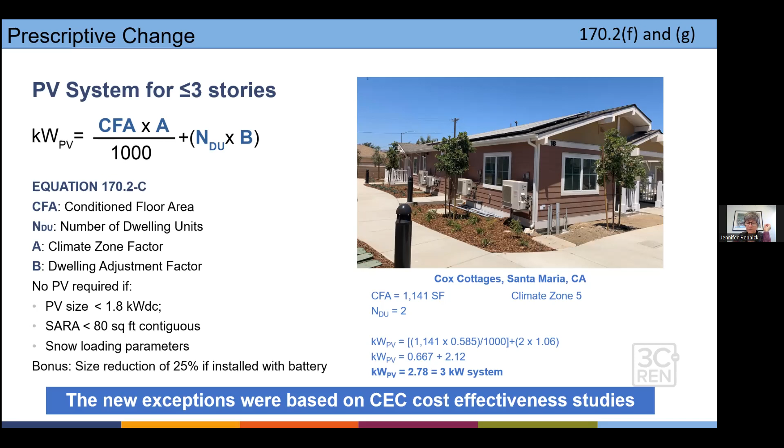If it's less than 1.8, you don't have to put in the PV system. And if you do include a battery, you can reduce the PV system size. This was all worked out to be cost effective. You can follow the formula, and I'll give you next a slide that gives you the tables, those values for the A and the B.

This is another project with a PV system size for 3 stories or less. In this case, we had 27 dwelling units and conditioned floor area of over 16,000, climate zone 5. So you can take a look at it as a building as a whole, or in the prior case, we just broke it out to each individual cluster of buildings and distributed the PV.

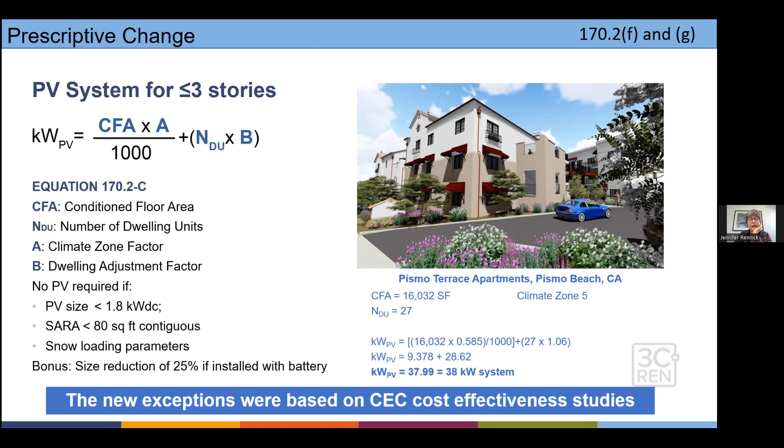This is an example for you guys that you can look at and follow. Here are the adjustment factors for the A and B based on your climate zone. So the PV requirement does change based on your climate zone.

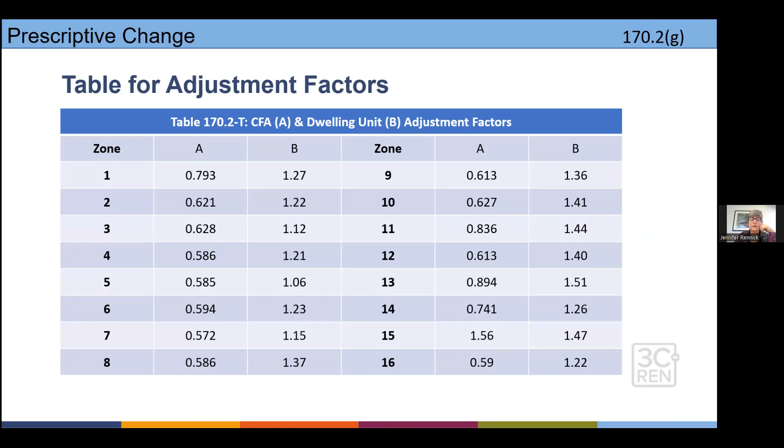For PV systems that are 4 stories or more, the requirements are slightly different. It's still based on the conditioned floor area, doesn't matter so much the dwelling units. The PV system size exemption has been increased to 4 kilowatts DC instead of the 1.8.

It's also based on an overall PV system size of 14 watts per square foot times that SARA, that available solar access roof area. So in other words, you get to choose between this formula or the 14 watts per square foot of your SARA solar access roof area, and choose whichever is smaller of a requirement.

It's also going to change a little bit with your project being mixed use and not mixed use. Instead of this formula being based on climate zone, it's actually based on climate zone and the building use. So in this previous example, we were looking at climate zone 5.

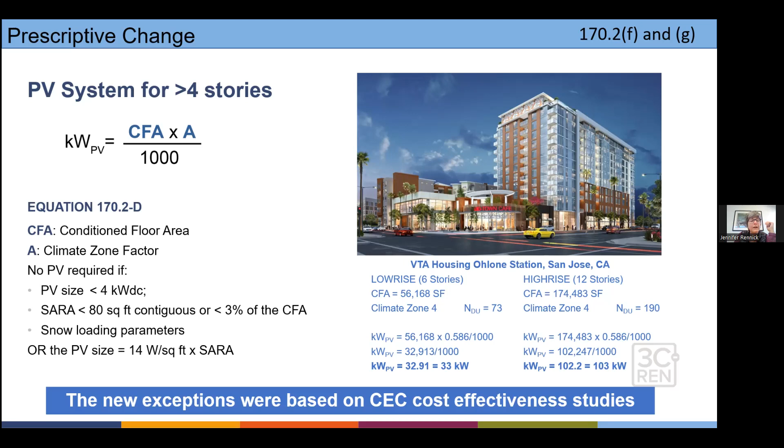And we were calculating it... I think I just caught an error. I am going to recalculate this and send you a new slide. I apologize, I will send out the slide deck.

But for high-rise residential, you come in here for climate zone 4, and you would be using a factor of 2.21 in that equation. Depending on your mixed use categories, you might actually have a portion of your project that's retail. If it's a high-rise residential, the retail portion may have one requirement for PV and battery, and then your high-rise residential portions are going to have another requirement for your PV system. And then those would be combined for your whole project.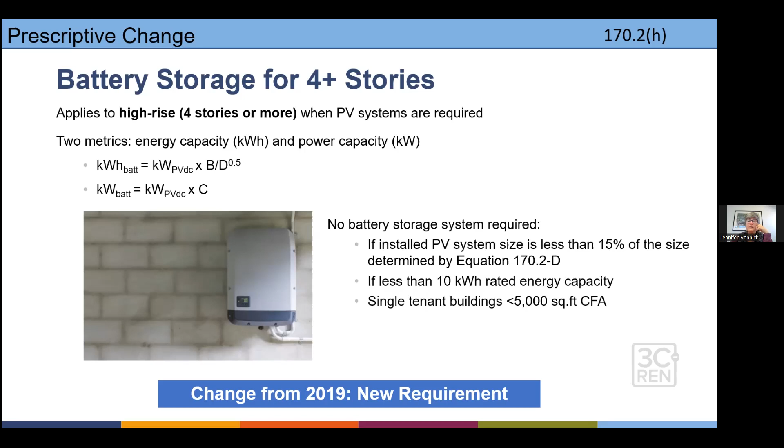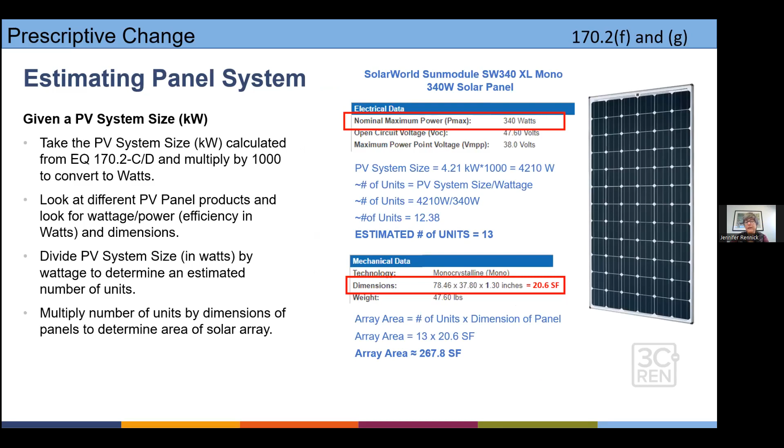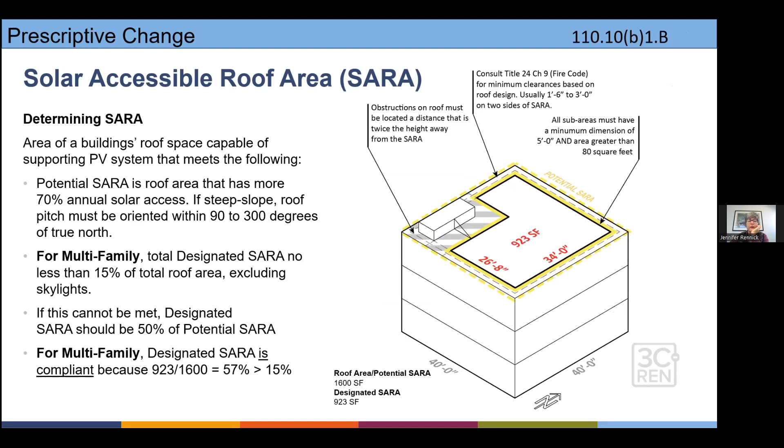And then I put this slide in here just as something to have in your slide deck in case you weren't familiar with what to look for on a PV module for its size, its wattage, just to give you an idea that once you know what your system size is supposed to be, you can calculate how much area that would take based on a PV panel. This is the example, and give you a little more clarification on what that solar accessible roof area is and what it means.

For the additions and alterations, it's a little nuanced. It mostly follows the low-rise residential, the single family. This is broken into kind of the general requirements and then additions, whether it's prescriptive performance, and then alterations. Those have their own mandatory requirements, prescriptive and performance, and then whether it's repairs or whole building. This really matches very, very closely with the single family residence occupancies.

Starting with that, probably one of the biggest changes is that climate zones 2, 4, 8, 9, and 10 got an upgrade for the roof and ceiling insulation to an R38. So maybe in new construction, you might only require an R30 in your attic, but under additions and alterations, it's the R38.

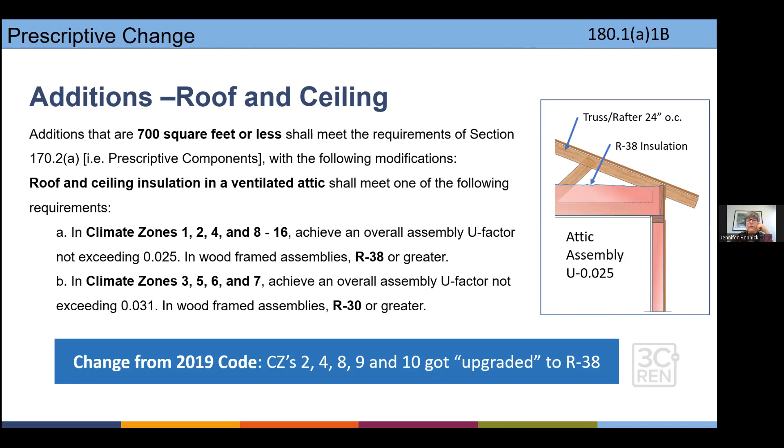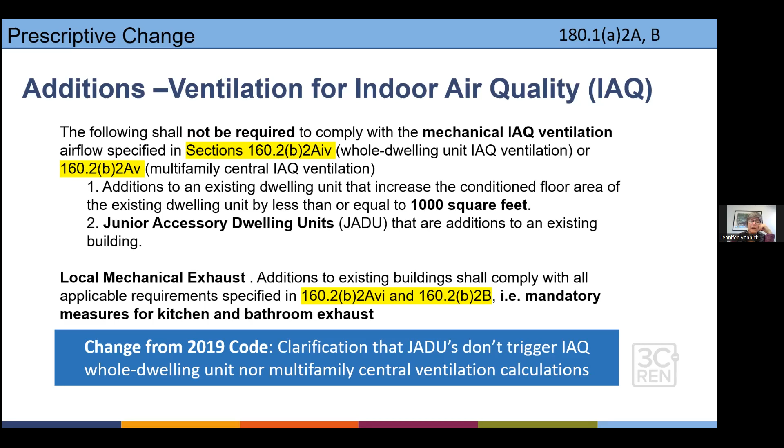The ventilation for indoor air quality has some exceptions. Per the energy code, if you do a junior accessory dwelling unit, you don't have to worry about meeting the indoor air quality ventilation section. Or if you're doing an addition to an existing dwelling that's less than or equal to 1,000 square feet - you may have a caretaker's residence and do an addition to that, you wouldn't have to meet the ventilation indoor air quality. But if you do trigger any of these, you must comply with the other mandatory measures we went over previously for indoor air quality and kitchen hood ventilation, exhaust, et cetera.

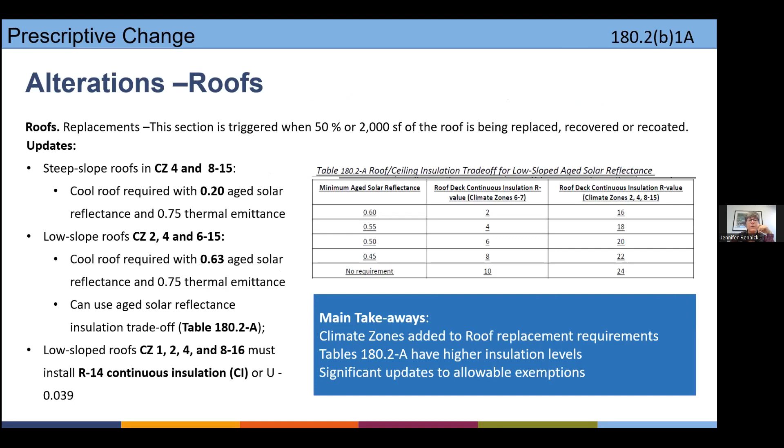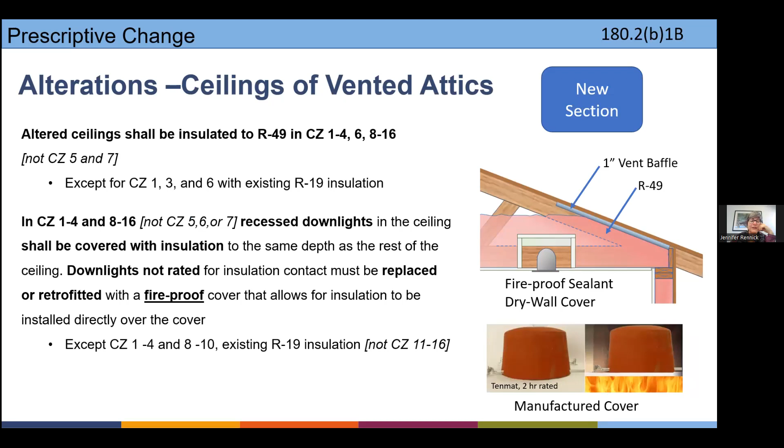It's nuanced if you're replacing your roof. If you are doing roof alterations and you are replacing 50% or 2,000 square feet of the roof, you'll want to come into this section because it's nuanced on what the requirements will be for the new roof and insulation. Probably a new section, but pretty interesting - now for certain climate zones, you would even exceed the roof insulation or ceiling insulation to an R48, R49, which is even higher than the R38 addition or the R30 you have in some climate zones. And there's clarification on what to do with existing recessed downlights and fireproof covers.

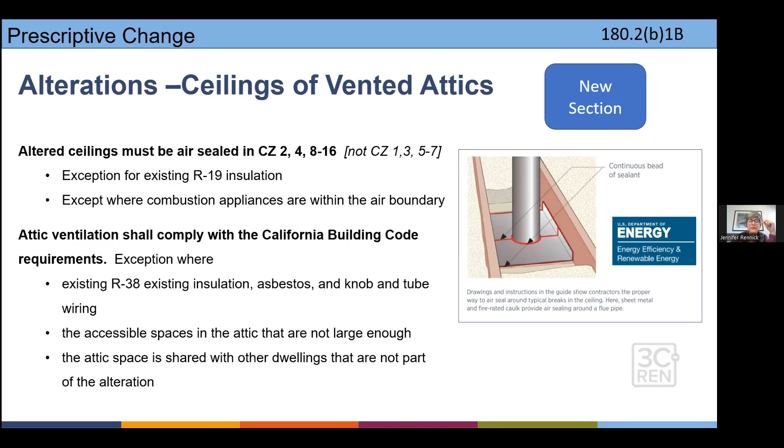There's been some clarification that when you do these alterations, you must include air sealing. If you're not familiar with that - for the builders and architects on the call - the U.S. Department of Energy has a guide that's great for what air sealing really looks like. When you see it in picture form, it seems pretty simple and straightforward.

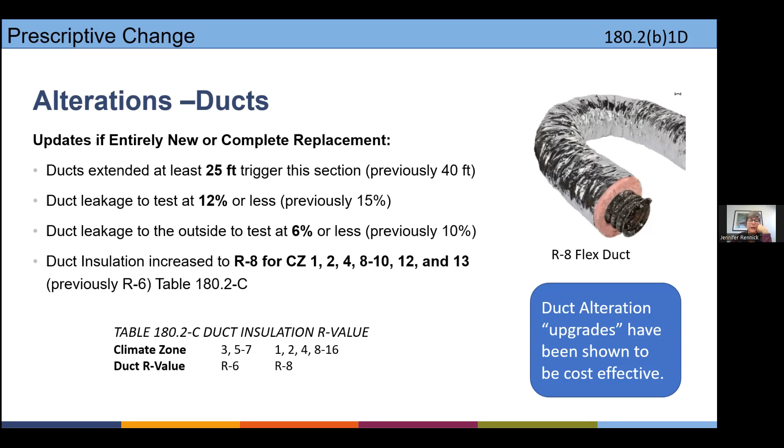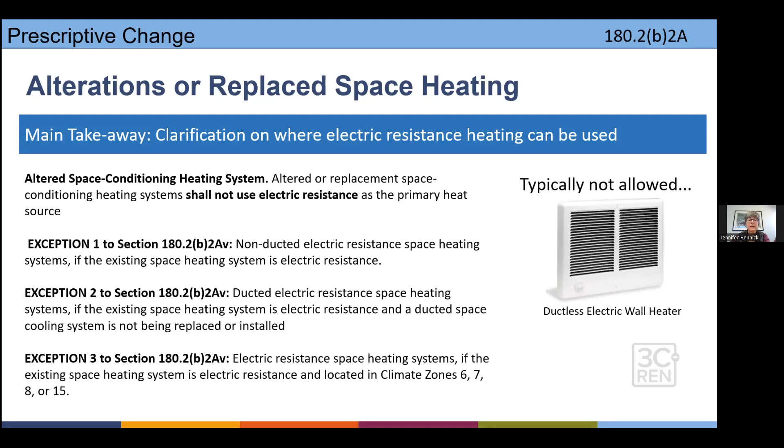There's been some new requirements and triggers for altering conditioned space heating system ducts. Duct leakage - allowable duct leakage has dropped, and now it's a 25 foot trigger instead of 40 feet. So if you are doing alterations on that, I would come to this section and make sure you're compliant. Last but not least, if there's an existing ductless electric wall heater in the unit and you're doing remodeling alterations, you can keep it or use it. But otherwise, just FYI, ductless electric wall heaters typically are not allowed, and you would most likely want to move to a heat pump.

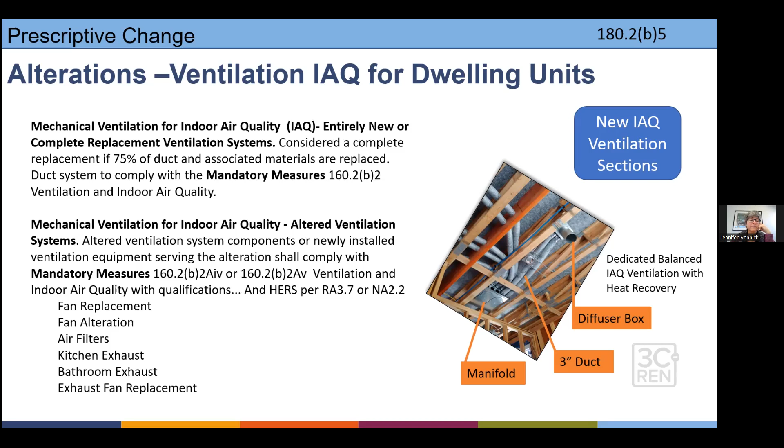For indoor air quality, almost the same requirements as everything else we went over. Main thing being for additions and alterations, if you're replacing 75% of the ducts and all the materials associated with it, it's considered a new system. Once it's considered a new system, you would comply with all those other requirements we talked about for duct insulation, air leakage, et cetera.

If you have questions, or later on have questions, or once you dig into this and realize you can't find the answer in these slide decks or your notes, please contact us through 3C REN for your Code Coach service. And with that, Sarah is going to wrap it up, and we might have a minute or two for any additional questions.